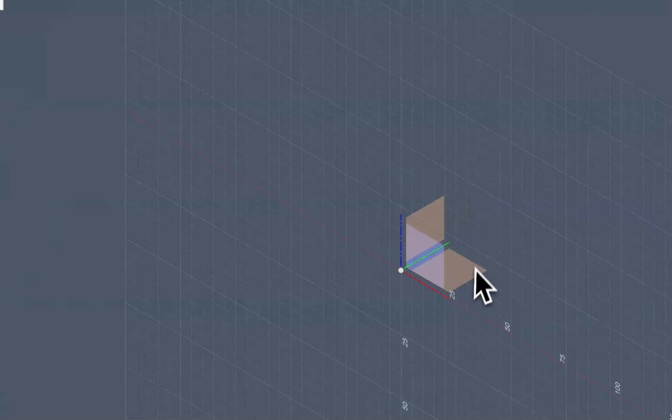Then later we go creating the first sketch. The first sketch we will place on the XY coordinate. This is the XY coordinate. If you don't know this, you can click on the origin and click on XY from here. Now we have the XY coordinate.

We click on the rectangle, click on one of the vertices, and when you drag it you see two factors. You can tab to move from one of the lengths to the other one. So I type, say, 31.1993 millimeter, I just type the name of the cube, the length of the cube you have. So I say cube and then select. Now going to the next one, cube, and then select. Now finish, and here we go, we have it.

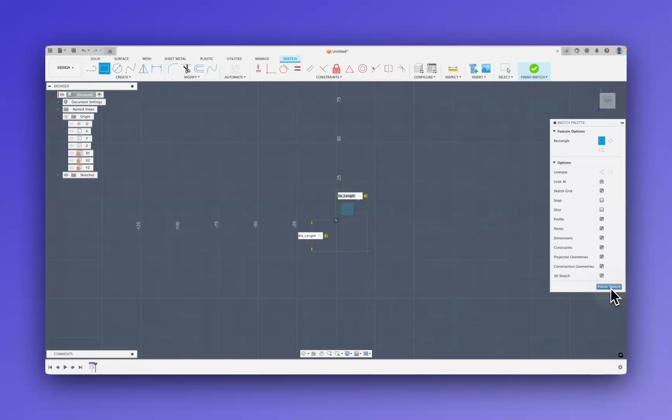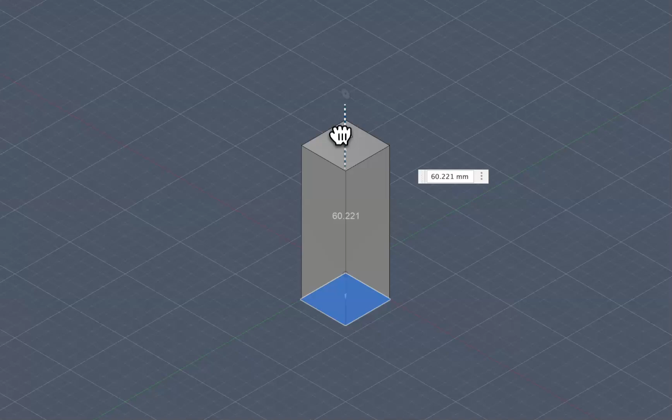So the next step will be creating, extrude this one to create the cube. Click on extrude. You can do it this way, and in this location you can say cube length, or you can come here and write the name of the length. So we have the cube. You can look at the front, this is our cube.

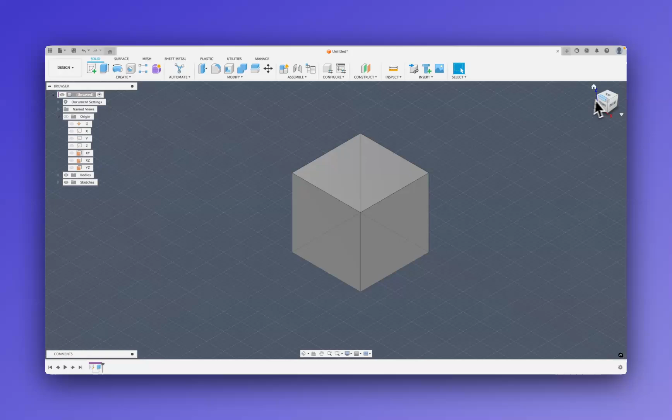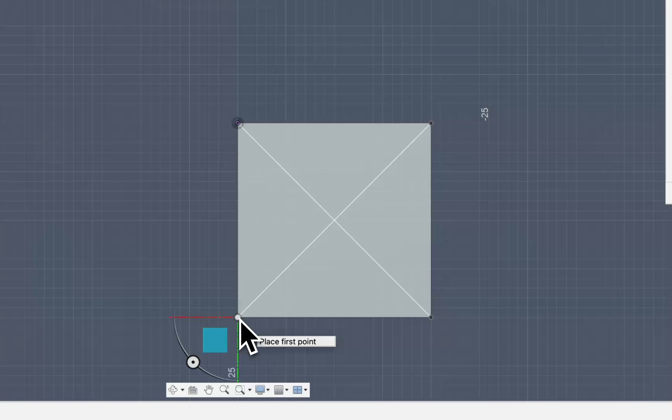The next step, we need to create 4 holes. To do that, first I will try to find the midpoint of this shape. So I'm looking at the top, clicking on the sketch, and I can pick one of these. Let's say pick this one, and creating 2 lines this way so I can see the midpoint, and I use the midpoint as the center of my circle. Now this is a midpoint.

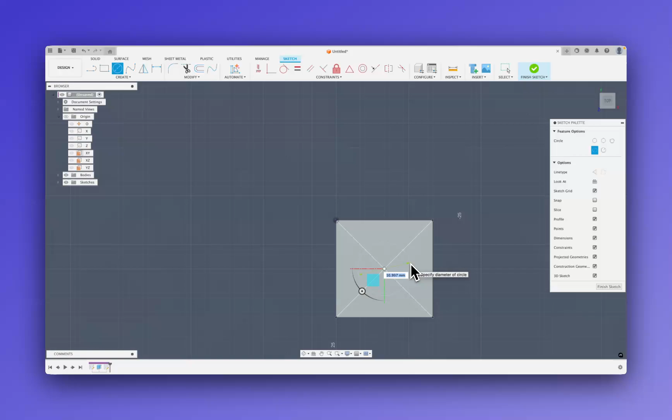I don't have to finish sketch. I can go right away and create our circle. Now usually in Fusion you have a diameter, but our parameter is radius, so we need to multiply it. To multiply, magnet radius, enter. Now we have our circle - if you don't want this, you can just delete this part, and after this you have the circle.

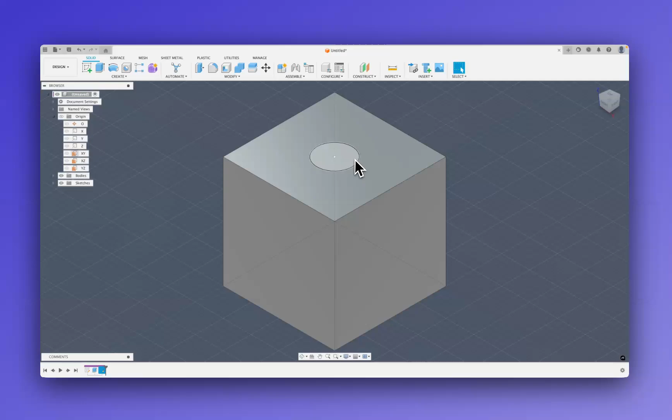Now click on home, you see the circle that will be used for a magnet. Click on this region and go to extrude. This time we don't go up, which would be extrude, and the negative will be - we want to make a hole. So what I can do, you can come here and we can say minus.

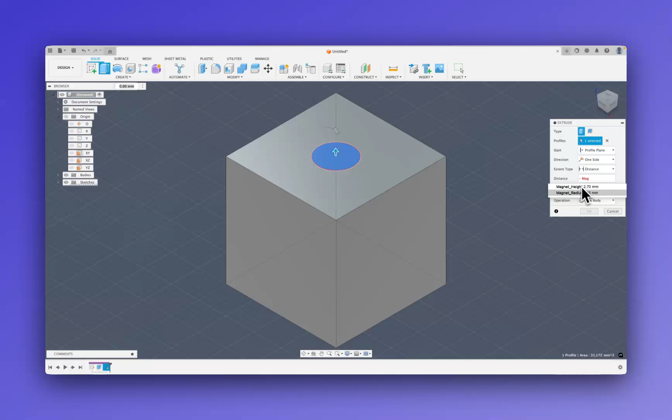We want it to use the magnet height for that. So we say minus magnet height. Now we're creating the first one.

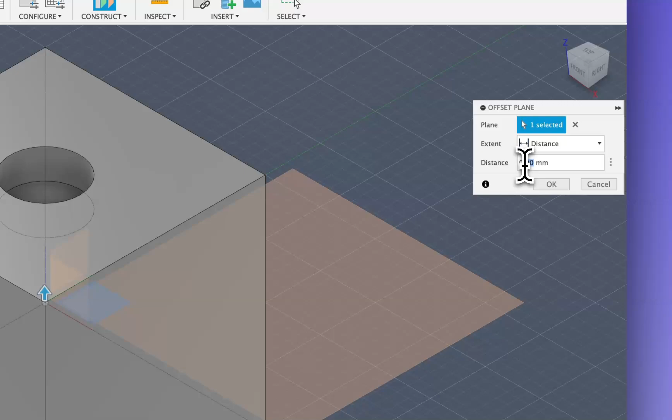For the next one, it will be parallel to this hole. I'm clicking on construct, and I will create the plane parallel to the XY. Here we go - sorry, I need to make a midpoint between... yeah, first I need to create an offset plane. So let's create the offset plane. The offset plane will be parallel to XY.

Sorry, it will be the length, cube length.

So now I have a plane. I have two planes parallel to each other. I want to find the mid plane.

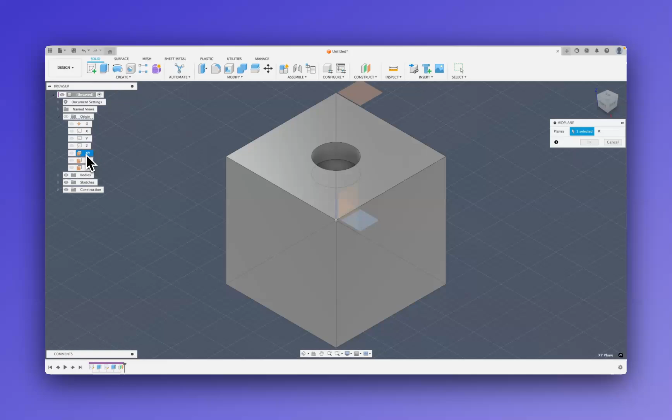Click on here, click on mid plane. I want to have the XY plane as the first one, and the second one will be the newest one. This plane will basically be the midpoint. If you want to see it, here you go. This is the mid plane.

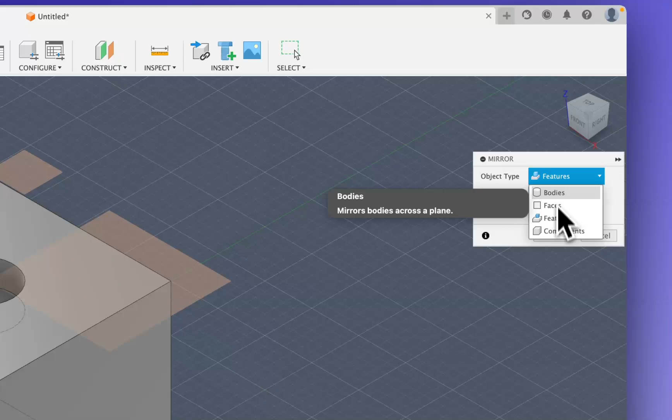So now what I'm doing is mirroring this hole to the bottom. Click on create, go into mirror. In this one you have multiple choices. You want to mirror the feature, which will be the hole. Click on the feature, click on the hole.

Next, select the mirror plane. In this case, that will be the mid plane. Now, as you see, this hole will be created. If you want to check it, look at the bottom and you'll see it.

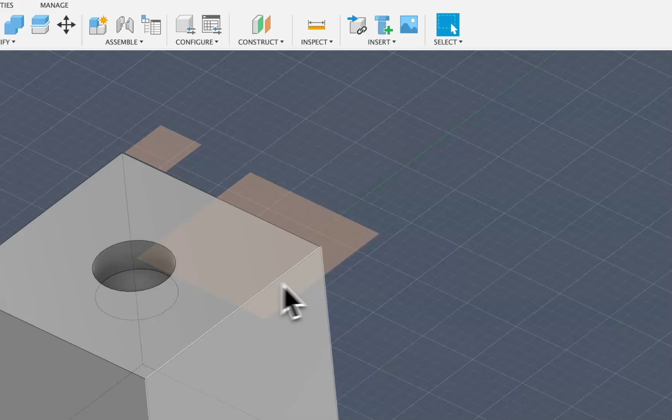Now we want to make two more planes from the side. So we can hide those planes, we don't need them. You can click on construction, we don't need those planes.

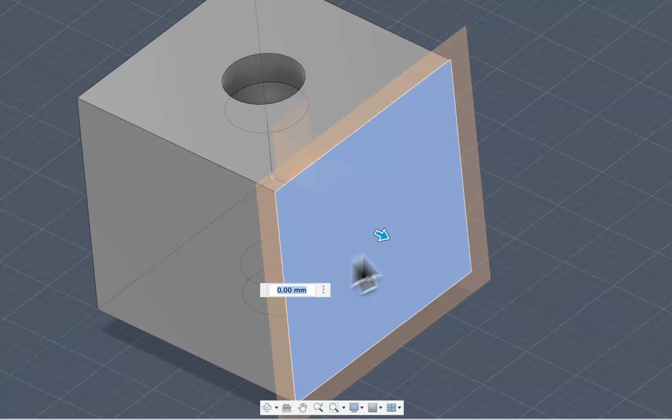Now I want to create the offset plane on this side. So what I do, let's create the first offset plane, that will be best. We already have the offset plane, or this one already exists. We want to go the other way, so we'll click in here. Cube length, but I want it on the other side, so I have to click minus.

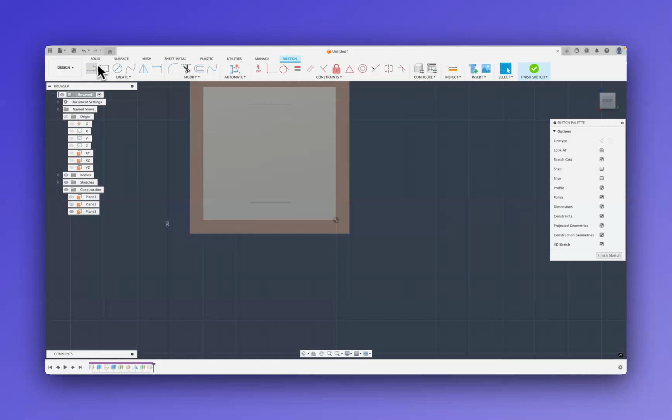Here we go. Now first let's make a sketch here. So, sketch, and first I do similar steps. I do two lines to find the center.

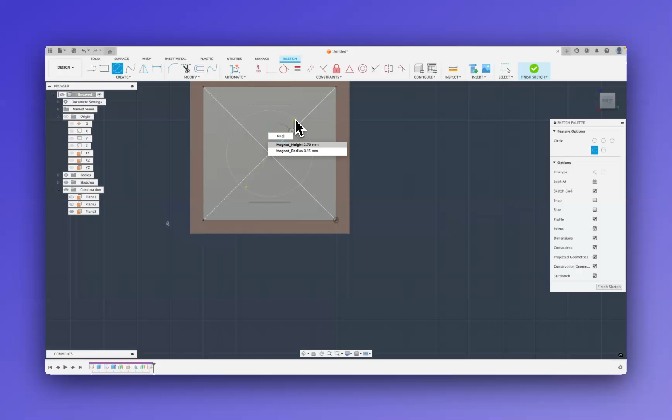Center of this square. Now I'm using the center of the square as the center of my circle. I'm using the magnet radius multiplied by 2.

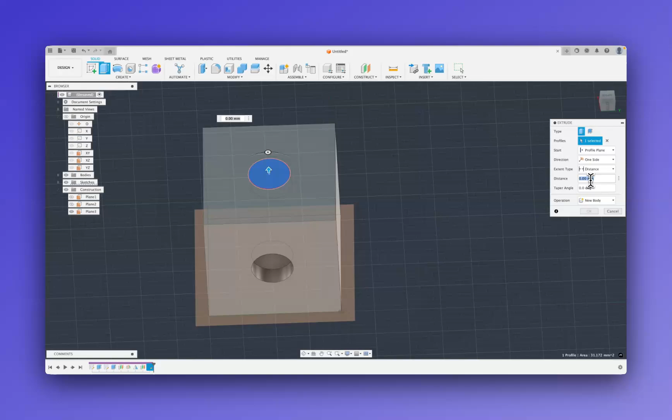Here we go. Now I don't need those two reference lines, I can delete them. And now let's do it this way. You can see it. I'm clicking on finish sketch first, and then click on extrude using the same, minus of course, magnet height.

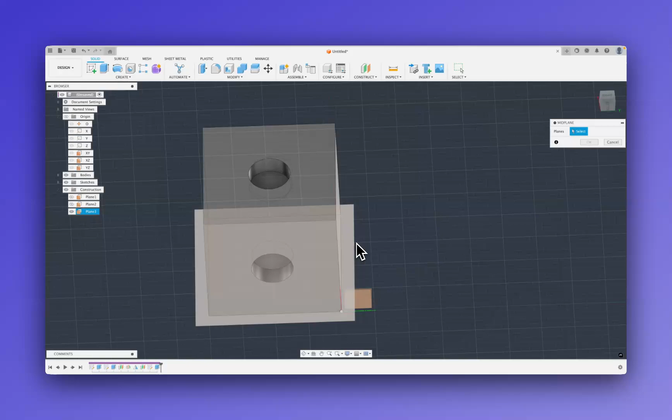Now the next step will be, so I don't know, the next step we need to create another mid plane, which I believe you already have these two. So let's click on mid plane, this one. We don't have this one, I believe, so maybe we need to create it. Okay, so let's create a mid plane.

So it looks like I don't have it, but let's click. Actually, we have it, so this is the mid plane.

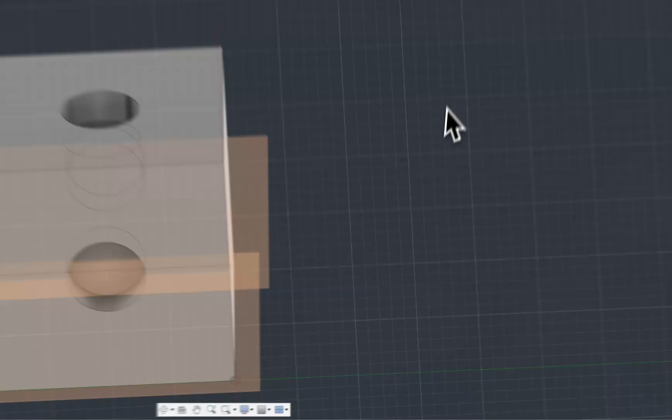Now let's go and project this, mirror the same thing. Click on mirror, first select the feature, it's already there. Select the feature, next step is to create this one, and now we have it.

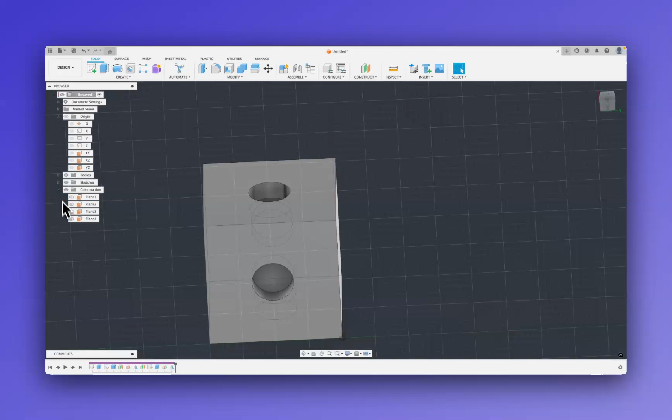So come to the construction, we don't need to see all this, and click on home. And now you see 1, 2, 3, 4. So you can play with it to see the others.

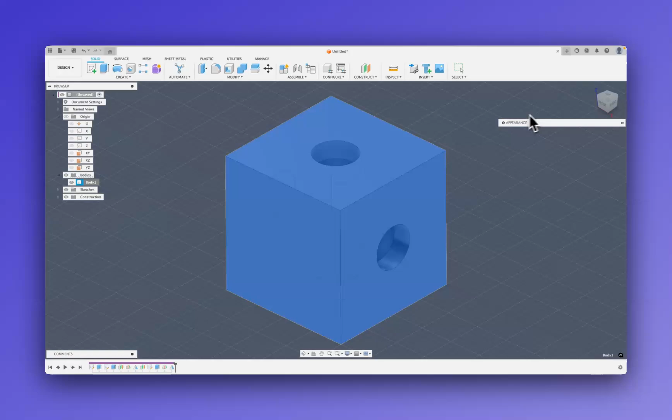And this is the way you create it. You can make it look nicer. So click on the body here, and you can click on appearance, and then let's call it red. Let's pick this red, or whatever red you have, and then put it here. This is not bad, this is good.

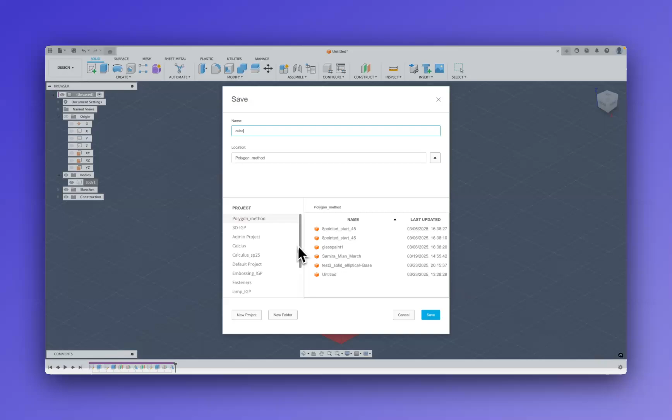So now the next step, the final step, we need to save it. And I call it cube, and I put it in the location that I already have, a project, workshop, save.

And then I'm clicking on export. And when you export it, you need to export it as STL. STL, this is a file. STL, and now the file is ready to print.

So let's click on it, and let's see. Now I'm opening Bambu Studio, and I look at my cube. So if you look at it, the cube is on this side, which is great.

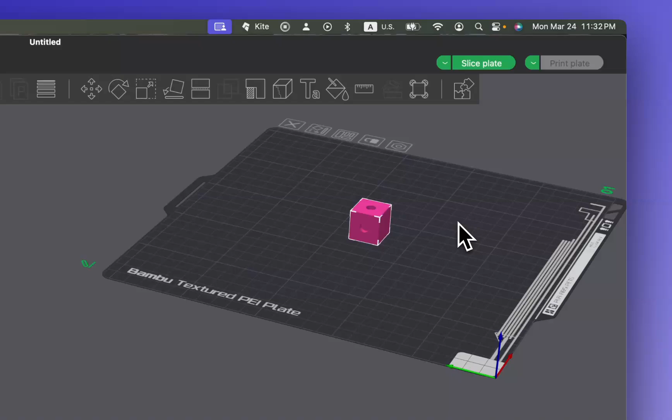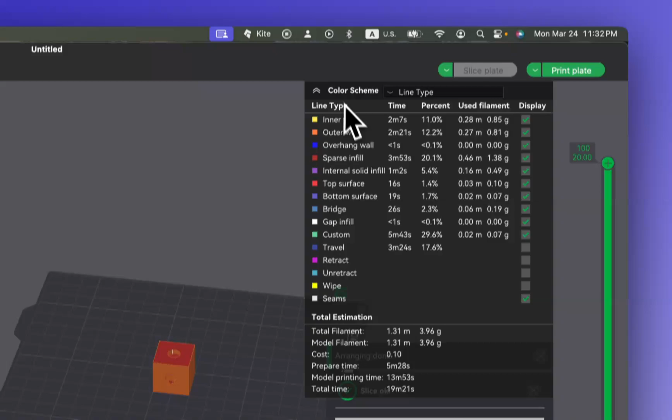Now if you slice it, it tells you it takes 38 minutes, because what I have, my nozzle is 0.2, but if you have a different nozzle, the less standard one will be 0.4. Let's see this one and see how much time it takes. It's actually 19 minutes, but you can print more than that one. So this will be, so that's it.

I hope this will be useful.